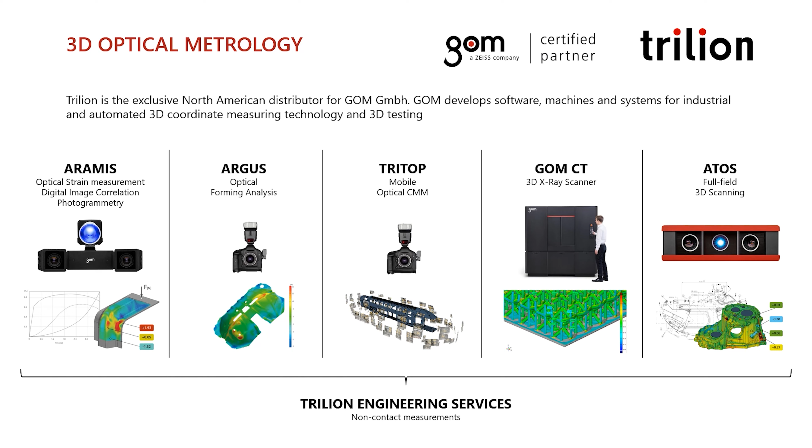These non-contact solutions have a place at every step of the product development cycle. Focusing on a few of the important steps today, we can identify topics where ARAMIS will answer those new challenges that the automotive industry faces.

ARAMIS was a critical part of the Ford F-150 conversion to an aluminum body. Along that process, ARAMIS was key in understanding the material properties and the mechanical behaviors of the vehicle design. Its data served as inputs for the simulation and for further design developments. The powerful part of ARAMIS is that every test completed correlates with the simulation across thousands of points.

Our agenda for today will be to cover these three stages of development and show you use cases in material and component level testing. So let's start with material properties.

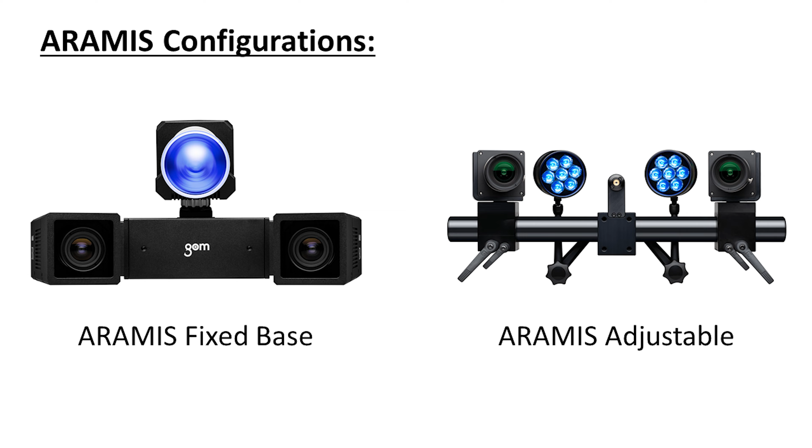Okay guys, we're inside Trilion headquarters, about to step into the lab. Before we do that, let's take a quick look at the ARAMIS. It comes in different configurations depending upon your application needs and budget, but the ARAMIS always has the same key features. Two cameras synchronized together, slightly tilted towards each other to see, just like your own eyes see, in 3D with that depth of field.

But the ARAMIS sees much more than the naked eye. It has the capability to measure displacements and strain deformations with incredible accuracy. So let's go inside the lab. What's going on in the lab today, Joe? I have an ARAMIS set up for material testing on our load frame.

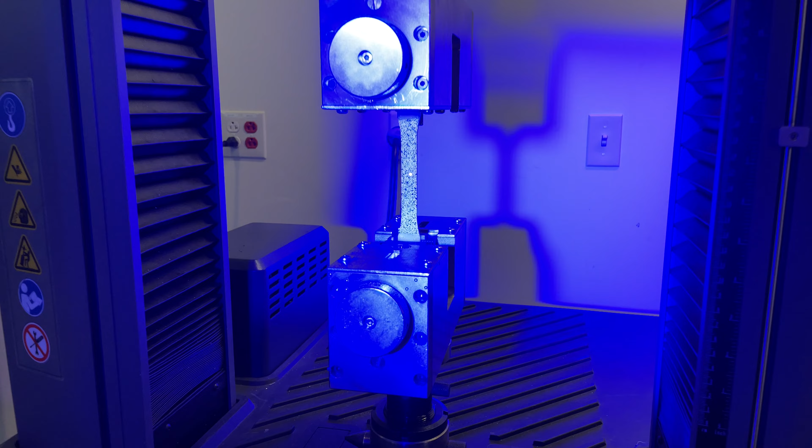This looks pretty cool. It looks like it's completely non-contact. You're just taking a measurement with just the cameras on the ARAMIS sensor pointed at the tensile coupon. Is that right? Yep. I apply a speckle pattern onto our coupon. I load the coupon like normal into our load frame. And then that speckle pattern allows the software to track the full field strain across the surface. It's like having thousands of strain gauges across your surface.

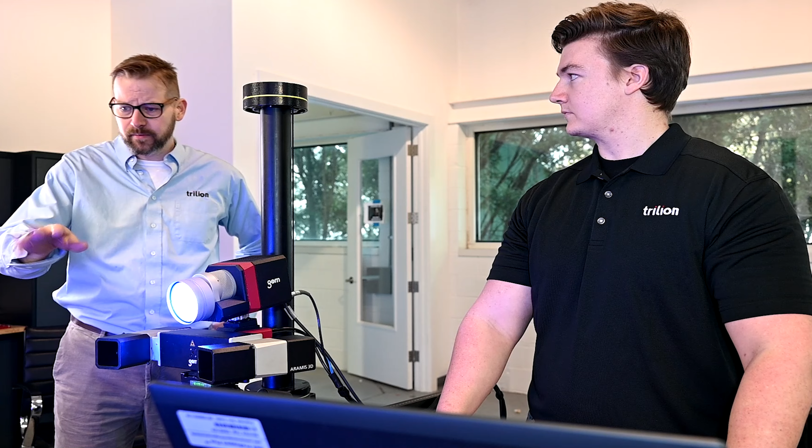Wow, okay. Well, if that's the case, then you must need a really good coverage of dots on the surface there. Can you show me how we would put that surface down? Sure. Here you can see some samples we prepared. These were completed with off-the-shelf spray paint. We spray on a light coating of flat white paint and then speckle on flat black dots on top of it.

Is that difficult to learn, to get used to like that? It takes some getting used to, but if you prefer, we have stamps, rollers, and even printers that will print the pattern for you. Okay, yeah, there's a lot of options there. That's great. Thank you. You're welcome.

Okay, great. Can you show me a little bit of the setup now? Because I'm wondering if you're linked to the load frame with the ARAMIS in some way. Yes, we are bringing in a cable out from the load frame into the ARAMIS controller, which you see here. This allows us to trigger from the load signal and synchronize all of our data together.

So I'm sure our viewers are wondering what type of material that you have here that we're testing. This is a plastic sample that we're using today, but ARAMIS can be used for any material because of its non-contact setup. As long as it can be patterned, it can be monitored for strain and displacement fields in time.

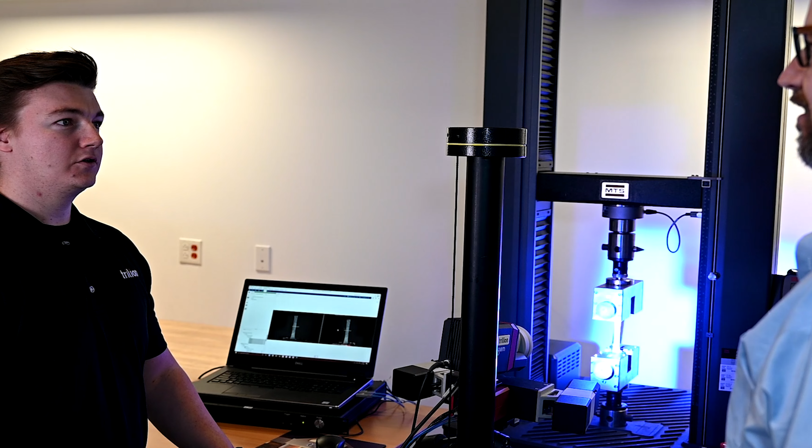So what about the geometry? Are we limited to just planar coupons such as this? No, some other interesting geometry applications common to our testing involve cylinders during compression and welded joints loaded uniaxially for inspection of heat-affected zones. That's really interesting.

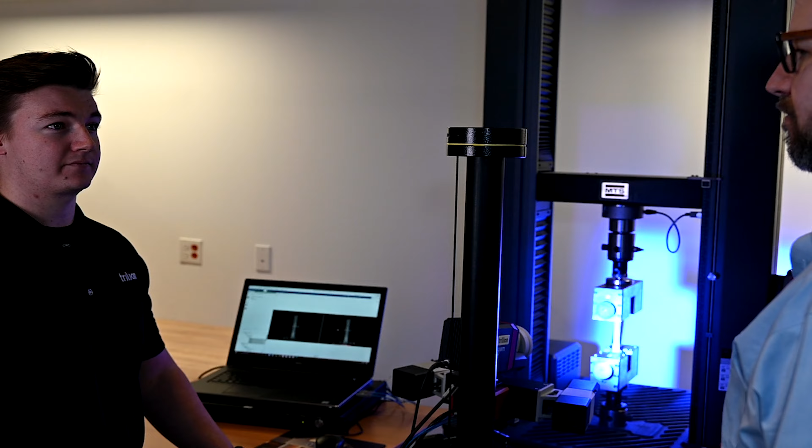What about shear strain propagation? Could you handle something like that? Yep, even shear strain. ARAMIS sees in 3D, so we will capture as much of the surface as we can see, measuring major and minor strains and directional strains, and we can get it all simultaneously across all those nodes of the speckled dots. Oh, that's fantastic. I'd love to see a demo of this.

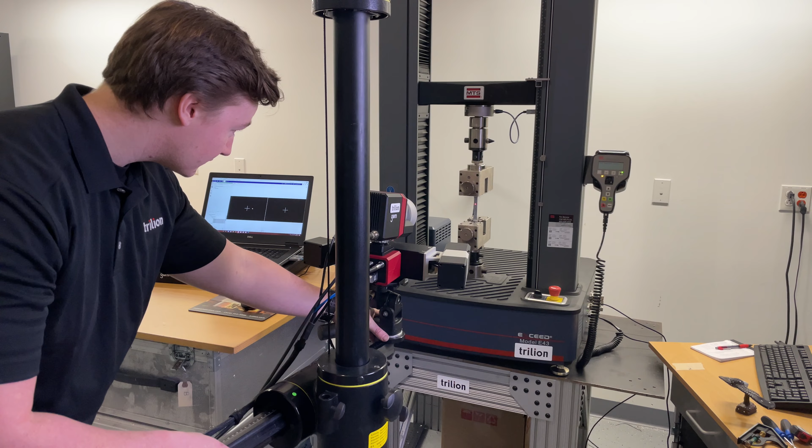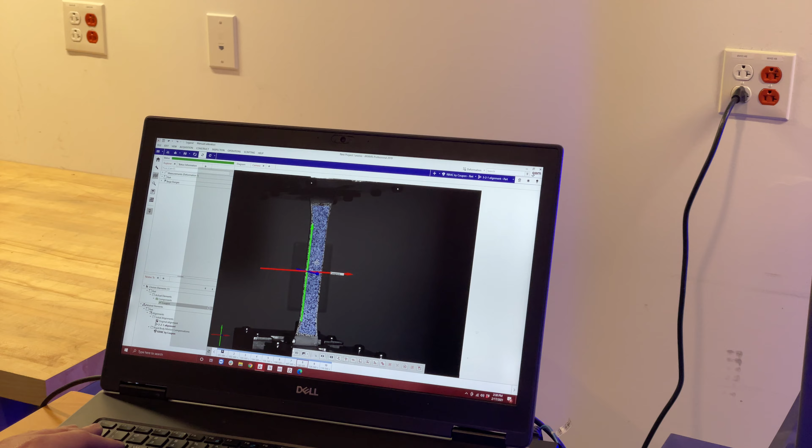In the software, we can manually inspect and take a look at live images of the entire surface of our part of interest. Once we have images here, we can then compute our surface and see the 3D nature of it. Zooming in, we can see the mesh structure and all the data points we get across the entire structure of our surface. Once we have our surface computed, we can then do strain inspections across the entire surface of the part. We're now seeing the full field strain across the surface there.

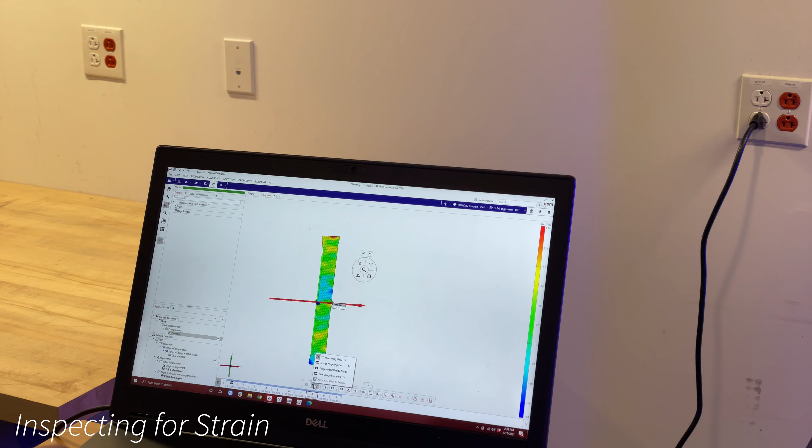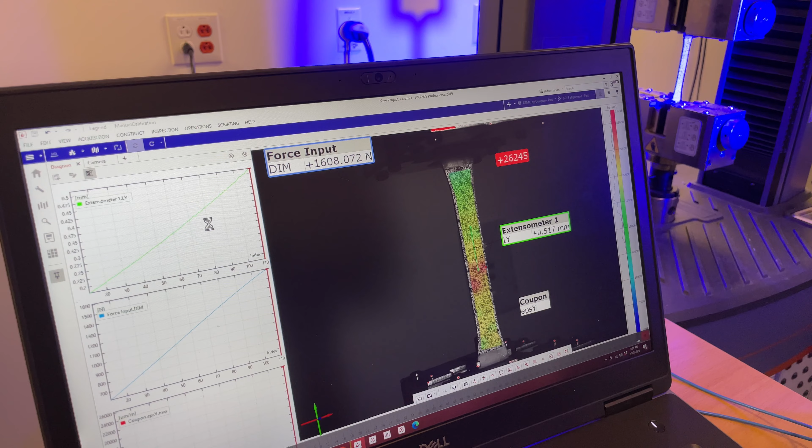Now during the live acquisition of our test, as we're recording and pulling the sample, not only are we seeing the full field strains live, we're also doing a 2-point distance or an extensometer and getting a live readout of that as well as a max strain level across the entire surface. And then once failure has occurred, we just simply stop the measurement.

So ARAMIS is used to measure material response in applications ranging from simple axial tension tests to shear testing to even split Hopkinson bar tests. Let's take a look at a few. The ARAMIS measurement technique delivers higher quality data for materials testing and is unmatched by clip gauges or strain gauges. ARAMIS offers the potential for thousands of points of measurement on advanced composite specimens rather than the 2-point tracking capability featured by most video extensometers.

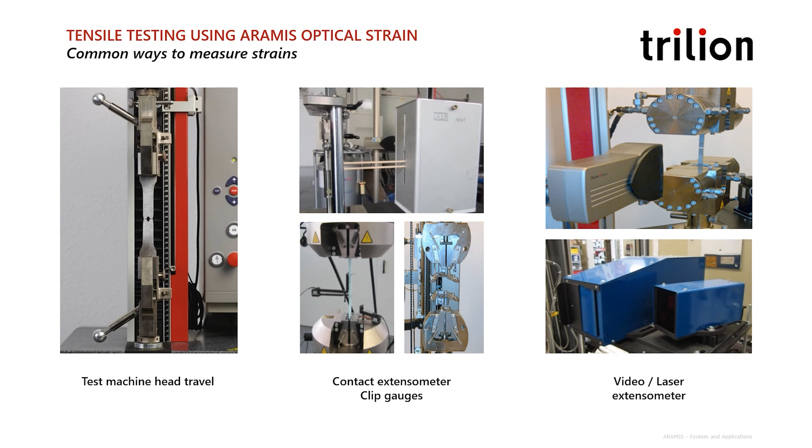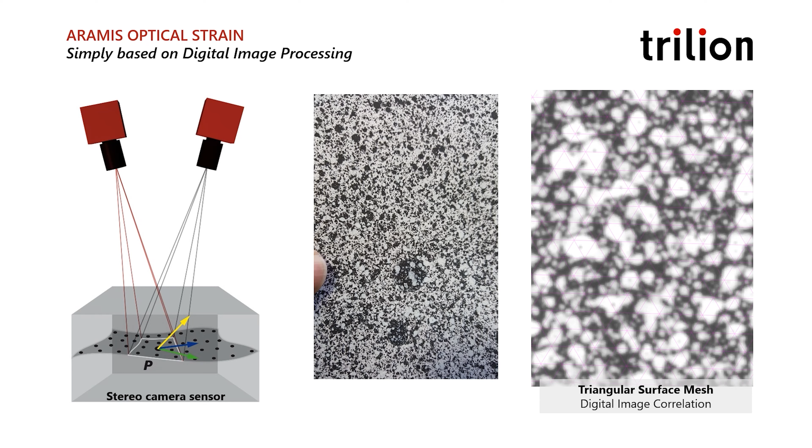The software will recognize the pattern and divide it into a triangular mesh that you can see on the right side. Each node represents a discrete location where we can pull strain information, both principal and directional. The spray paint becomes thousands of strain gauges across the surface. Think for a moment about the time it takes to lay a foil strain gauge, set up an accelerometer or an extensometer, and now consider how you can spray thousands of 3D coordinates across your sample surface.

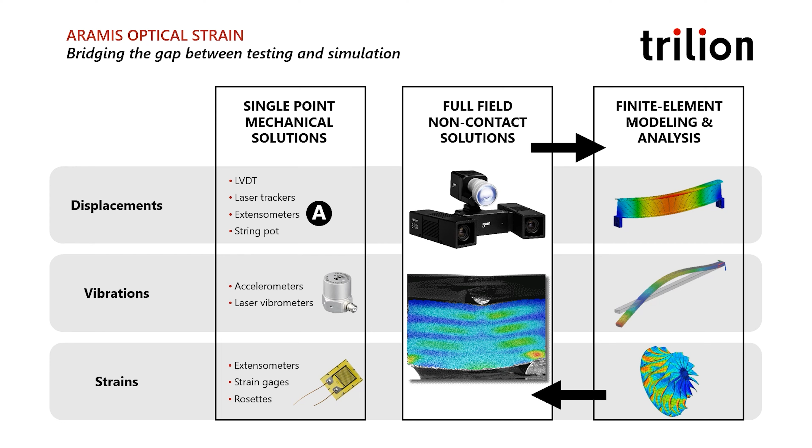We call this a full field measurement, and it tells a holistic story that can be intuitively understood just by viewing it. The ARAMIS has been certified as a class 0.5 extensometer according to ISO standards, or a B1 or higher extensometer according to ASTM standards. The data can also be overlaid into finite element analysis simulations, bridging the gap between simulation and reality. These full field measurements allow for examination of localized behavior and extraction of data at multiple distinct areas of interest.

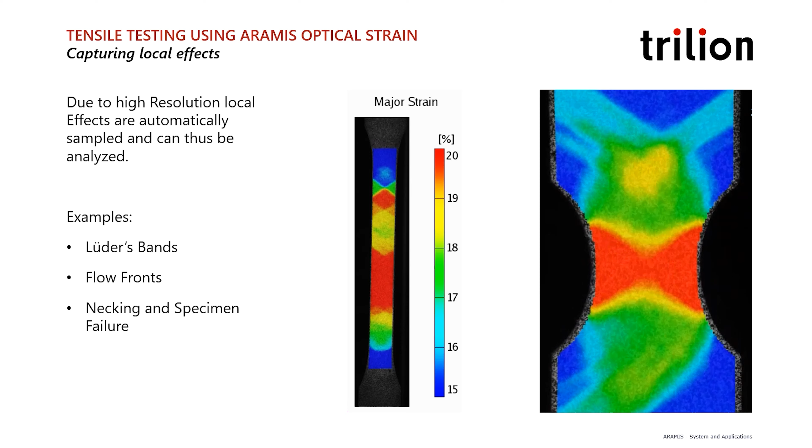There is no inherent length scale to ARAMIS, where a clip gauge or extensometer will be limited by its gauge length. ARAMIS can capture both strain localization and the global strain, and it's this high strain necking area that is responsible for more accurate material properties, a crucial factor in simulations.

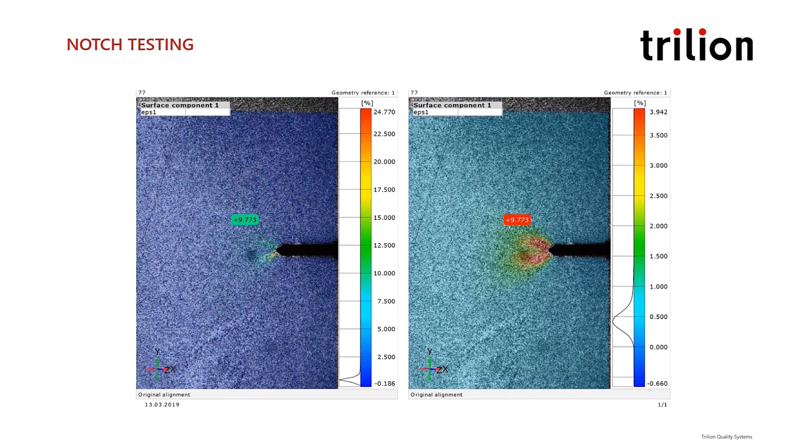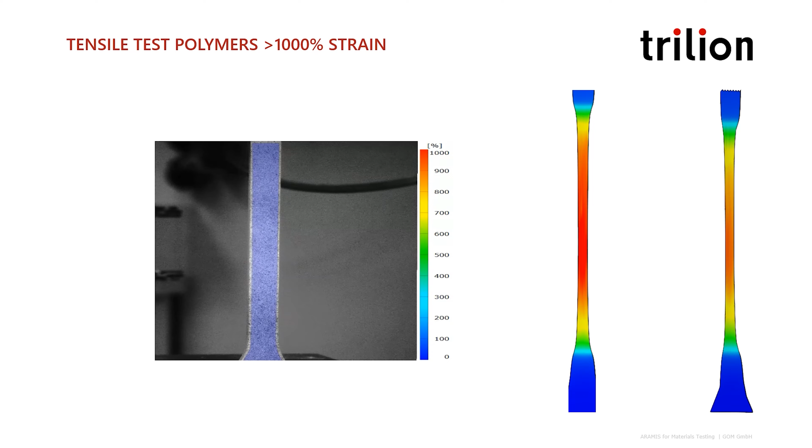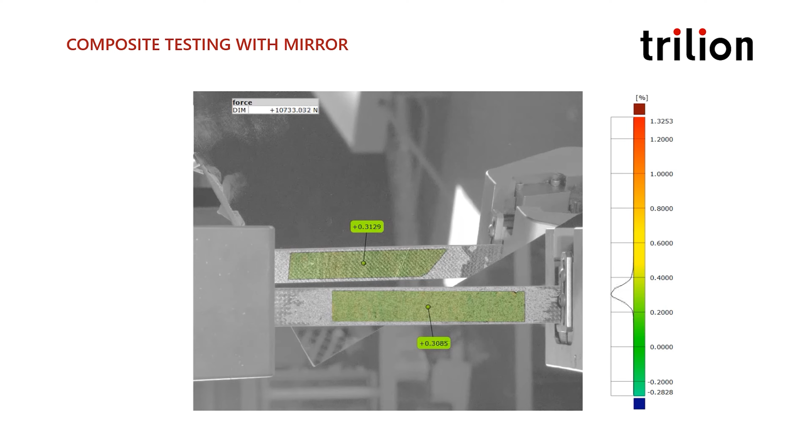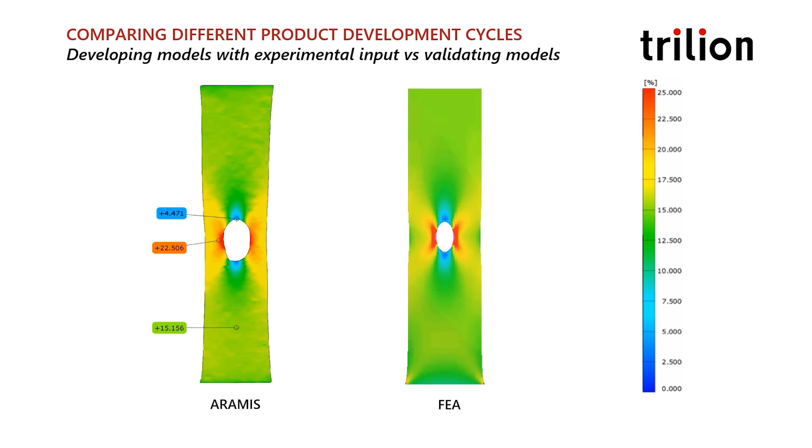ARAMIS works very effectively as an input to your developing simulation model. The finite element model can be brought into the ARAMIS software, aligned and compared to bring the model ever closer to reality. This system is independent of geometry. So far we've only explored planar samples, but it is not an issue to explore cylinders or other more complex geometries.

ARAMIS is also useful in measuring custom or non-standard tests. It is possible to track the speckle pattern during adhesive peel tests or shear tests, and ARAMIS is used often for sealants and adhesives, can easily track shear strain and other rotational measurements.

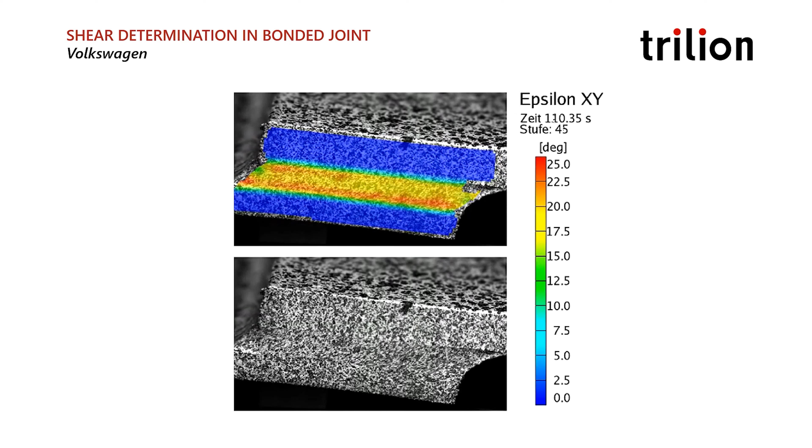When synchronized with load history data from the testing frame, the ARAMIS data can be configured to automatically plot the stress-strain curve and find material properties according to ISO ASTM standards. This can be configured as a technician's tool, minimizing the number of mouse clicks, but also the amount of training needed. The kiosk mode prompts the user for the steps of the measurement.

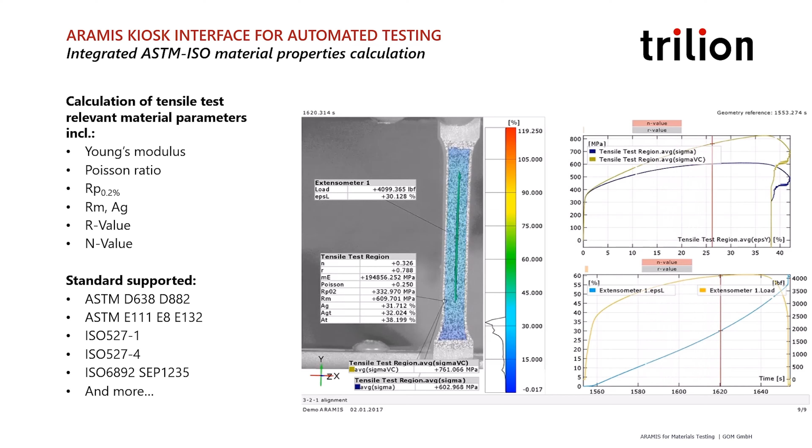The system is independent of temperature and can see through a chamber window to make strain measurements such as this, a tensile test of magnesium at 300 degrees Celsius. Our researchers have developed a partnership with infrared cameras to create an ARAMIS thermography module. An IR camera with trigger synchronicity is linked to the ARAMIS, and the thermal data can then be brought into 3D coordinates and mapped across the specimen's surface.

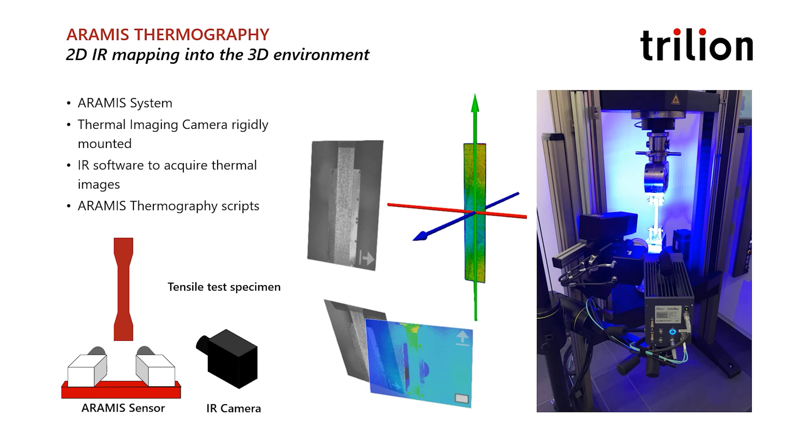The coupling of temperature and strain data often is a byproduct of the large temperature range of operational environments. Sometimes the functional integrity of the material may depend on the influence of temperature. This thermography module is useful in a dynamometer on the hot side of an engine, or to the powertrain group, measuring an exhaust manifold, for instance.

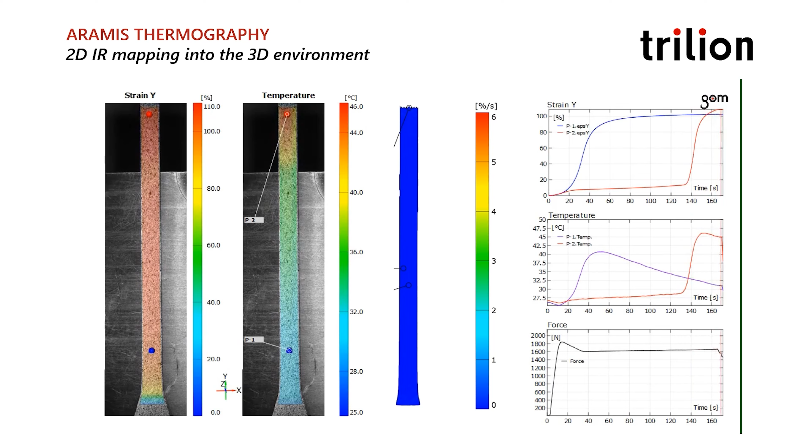It is also very useful in microelectronics. In this experiment, the temperature mapping is correlated with thermal expansion. If the user understands the material coefficient of the thermal expansion, ARAMIS can compensate and isolate the mechanical strain.

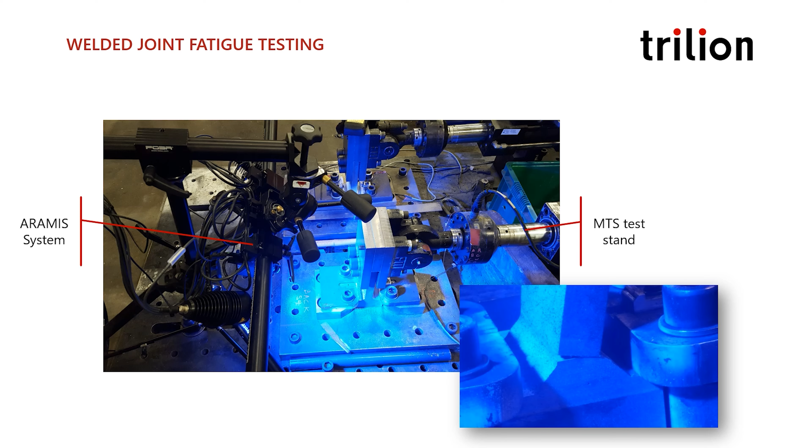The system is independent of time, measuring this high cycle fatigue test of a welded T-joint. In this experiment, the T-joint was rocked back and forth cyclically by the load frame, and ARAMIS captured at peak load times. Over the course of 20 hours, the T-joint crack began to open. The analysis here was done after failure. A virtual 2-point distance was placed down to monitor the crack opening, but only after discovering from the images where the crack originated.

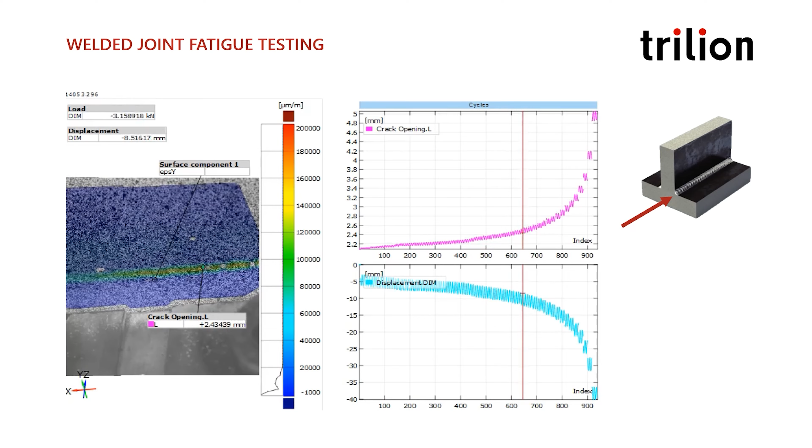Sheet metal testing is an indispensable part of automotive production. The OEMs monitor their tool and die for forming severity of a stretched or draw product with our ARGUS technology, but our ARAMIS could tell them more. The severe forming that takes place in production cannot be understood through uniaxial testing. Biaxial dome testing, such as the Nakazima or bulge test, yield the material properties necessary to build sheet metal forming limit curves.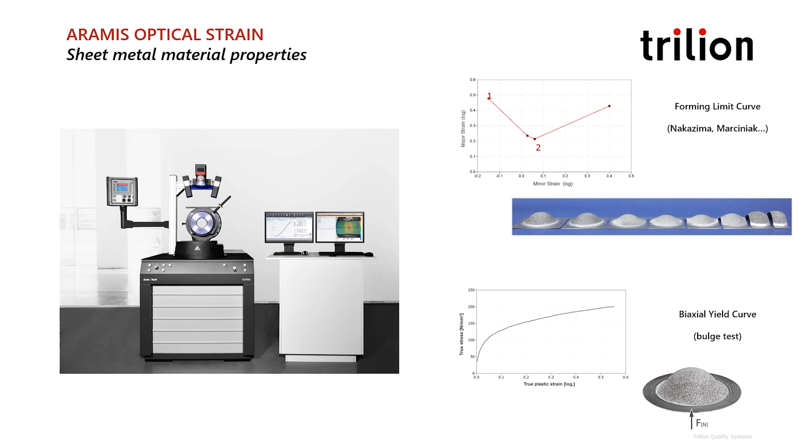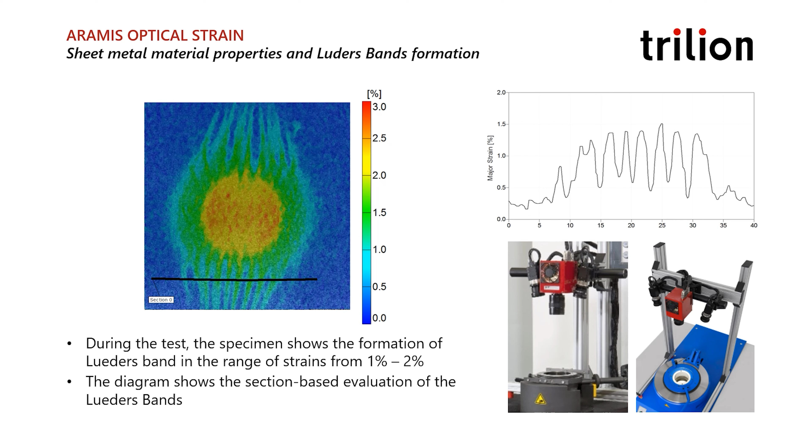The ARAMIS is mounted above the dome and shielded from the high pressure oil while the material is taken to failure over a series of tests. The ARAMIS is designed to take this data and automatically process it according to ISO standards. This results in a forming limit diagram such as this, a crucial predictor of material behavior for production quality.

The system is independent of time, temperature, loading, and geometry. A user can set their own gauge length according to their application. ARAMIS is capable, unlike conventional tools, of measuring high strain area in an accurate way. It is non-contact, it's massless. ARAMIS will measure both local and global strains. It's capable of scripting and it features a kiosk mode. The most powerful benefit is its ability to overlay results with finite element models, making it an indispensable tool for materials research.

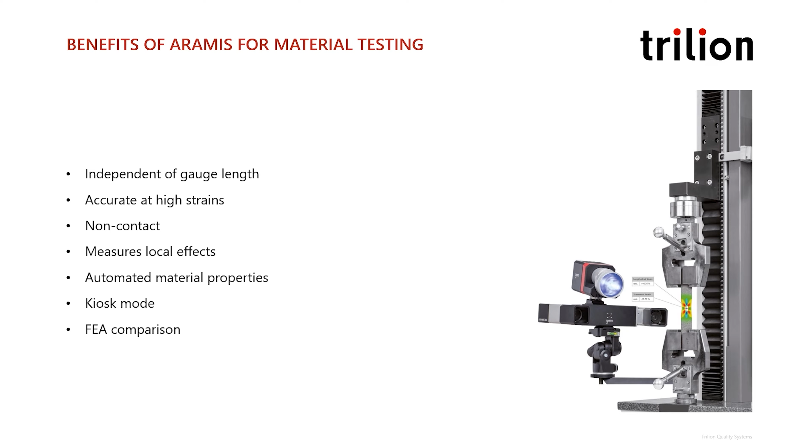We're back on site at Trilion headquarters for a second round of testing. We now have a better understanding of the ARAMIS, its setup, interface, and its critical ability to provide input parameters into the simulation model. Let's now turn to product design. ARAMIS can also help develop input parameters for structural and component level testing. We're going to be exploring how ARAMIS can work on an actual vehicle. So let's step into the lab and take a look. Come on.

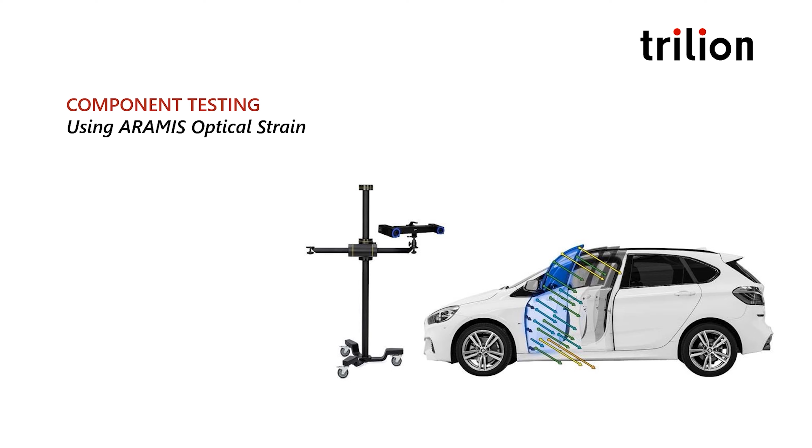Now let's turn our attention to ARAMIS component level testing, where we can measure and inspect features from small to large all around the vehicle. Another way of tracking that the ARAMIS uses is point marker tracking. These are lightweight adhesive stickers that are optimized in size for your field of view. We feature them in different variations. Some are easy to take off, some are permanent, some are magnetic and reusable, and some are capable of withstanding high temperatures. Wherever you place one, the system will automatically find and track a 3D coordinate for displacements and vibrations.

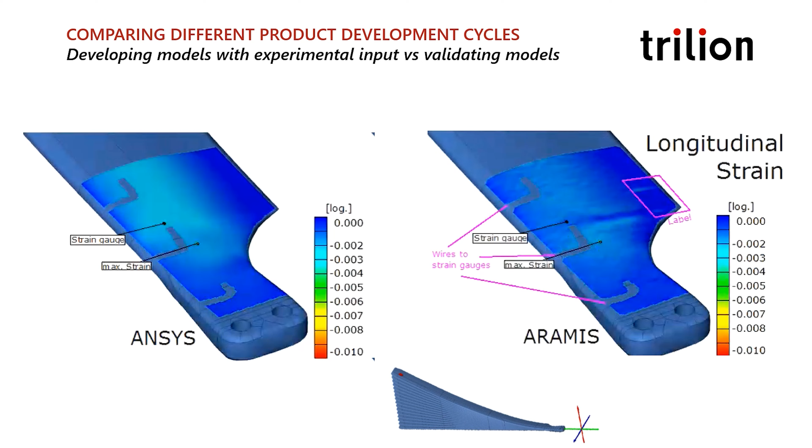Here is an example of a simulation being compared with ARAMIS full field reality. You can see the shadowy representations of the wired strain gauges in both the simulation and the ARAMIS on the right. The CAE department had predicted and instructed the test engineer where to place these sensors. The strain gauge data showed some deviation from the simulation, but the ARAMIS told the full story. You can see a splicing defect just out of reach of the strain gauge.

Hey Joe, how you doing, man? Looks like you've got some stickers here. What you up to? Yeah, Justin, I'm putting down some target dots on this hood here. Each target dot is going to give me a 3D coordinate space that I can track and measure. You already saw that speckle pattern before, which is giving us that full field strain coverage. But each one of these target dots is going to give me discrete point locations that I can measure. That's great. So you're measuring displacement with these dots then? Exactly, yeah, we're measuring displacements. Okay, cool. So it looks like you've got them all over the hood. And are you going to be tracking the movement of the hood?

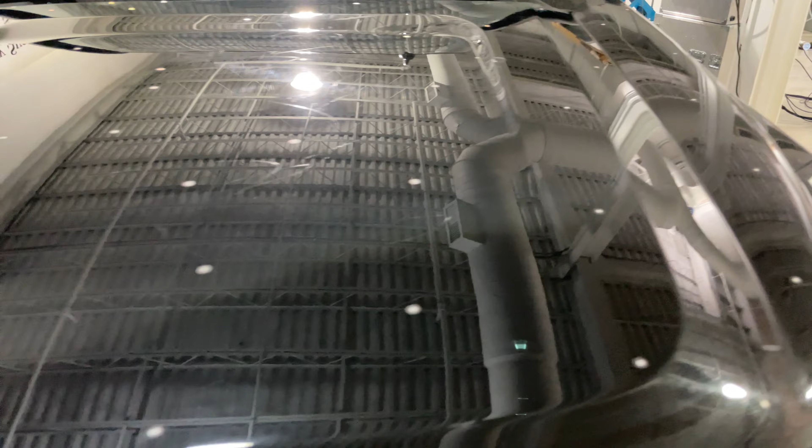Yeah, so actually what I'm going to be doing is I'm going to slam this hood down, and then I want to track the relative motion of the hood here. Wow, that's pretty cool. It's going to be really fast. But you know, you have some dots here on the side. It's not even part of the hood. What's your reason for doing that? Yeah, so I put these dots here on the body so I can do a rigid body motion compensation. What that allows me to do is look at the relative displacements on the hood instead of the whole global motion of the entire car as I slam my hood down. I see. When you slam it down, you're going to get a global motion. You can correct for that. Exactly. That's really cool.

But slamming a hood is very violent. I would think you need to have high-speed equipment to do something like that. Right. So what I'm actually going to do is use that light gate there, which is going to be sending a signal when I slam that hood down to our sensor, and our sensor does 2,000 frames per second, which is perfect for the automotive industry. Okay. But if we do need to go higher than that with the frame rate, then we can provide Photron cameras. Wow. Okay.

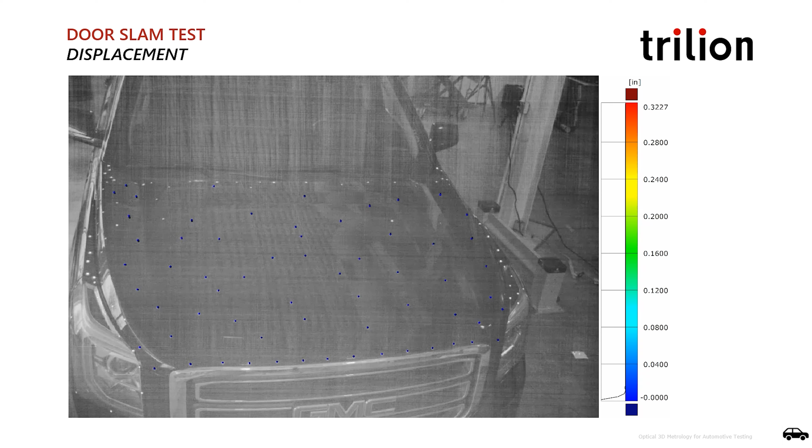Through the rigid body motion compensation feature of ARAMIS, the displacement of the hood is isolated and the full motion of the vehicle has been compensated from these results. Here you can see the vectors telling a story of direction and magnitude. What area sticks out to you?

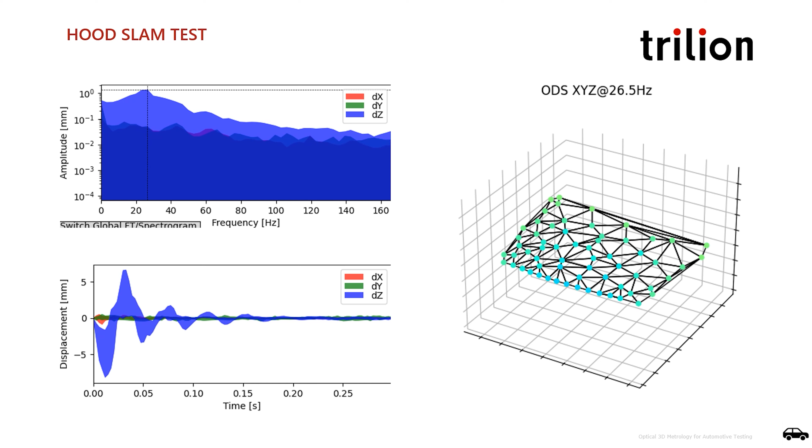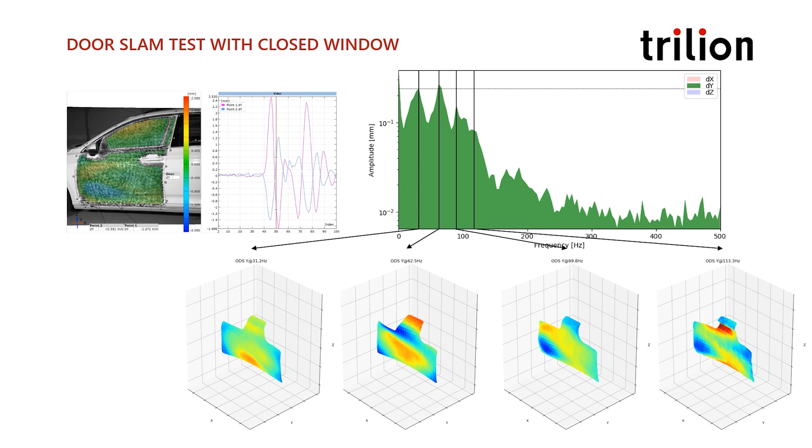ARAMIS can be used under the hood as well, so let's take a look at a quick engine study. ARAMIS customers use the technology to measure and verify simulation on many parts of an engine. Perhaps they are interested in an oil feed or drain and its vibrations, or they're interested in thermal expansion of any number of components, whether they be bellows, flanges, inlets, outlets. These can all be very important as new turbo engines are developed.

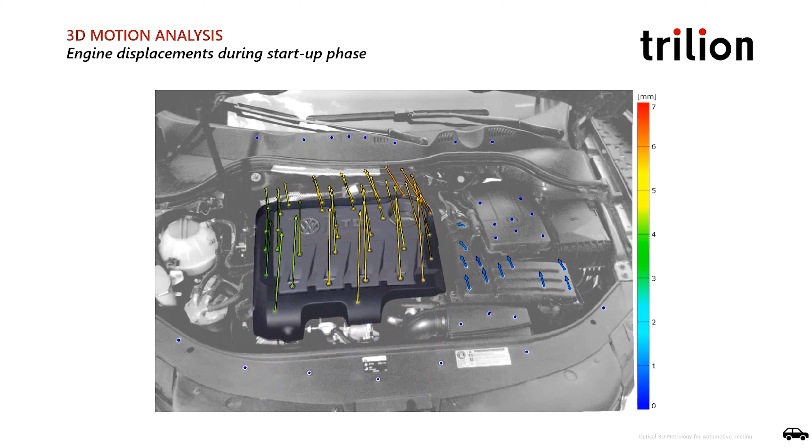In this test, we wanted to measure and isolate the engine during its startup phase. The point marker stickers we place down on the body of the vehicle serve as our reference as we measure the engine top while it starts up. The vectors tell a story of direction and magnitude.

Wow, that was a cool experiment, Joe. I feel like ARAMIS just has so many possibilities. It really makes me wonder what else we could do with it. Well, if you would like, we can roll this sensor to the back of the car and measure the displacements of the lift gate as it closes. You can just do that? You don't need to recalibrate the system?

Not at all. So this is an ARAMIS fixed base sensor. What that means is that we can go long periods of time without needing a recalibration. That's nice. So it sounds like the setup is just patterning and then positioning the cameras. Is that true? Yeah, so we can do this exact same setup with the lift gate, the body side, the tires, the whole vehicle. Wow, okay. Just rolling around your lab, taking measurements. That's pretty cool. Let's go do it. Yeah, come on. Cool.

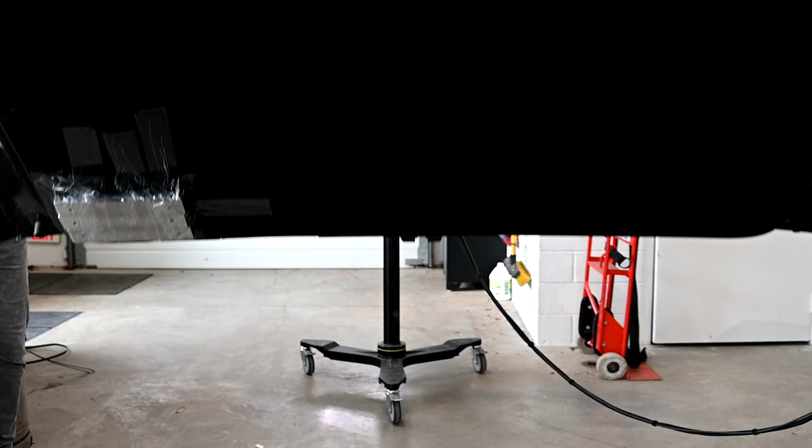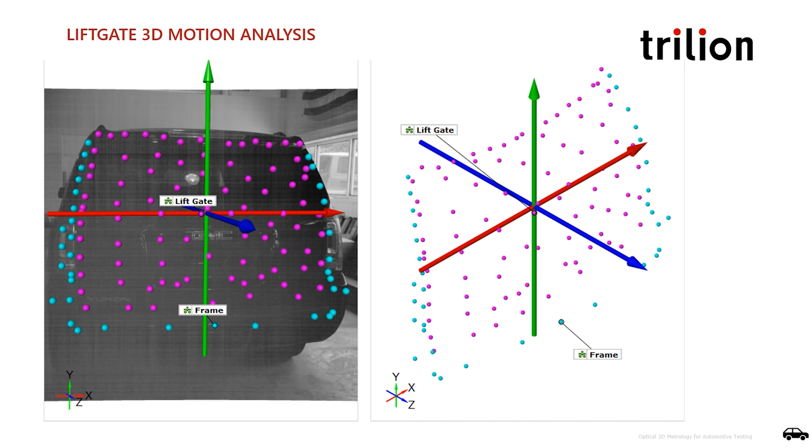For this project, we selected the dots for the frame and then for the liftgate, keeping them separate for our rigid body compensation and isolation of the liftgate. For this project, we shut the liftgate 3 times.

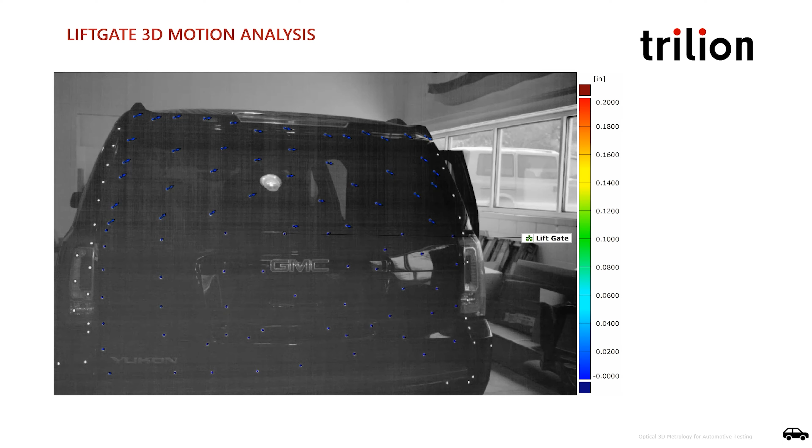We wanted to do a simulated design comparison, so we added some weight to the right side of the liftgate to see what happens. The first iteration was with no weight, just a standard close of the gate, and the second we added a 1-pound bar. You'll see those displacements grow larger from the first time. And the third iteration, we added 3 pounds. The motion analysis shows larger and larger oscillations with the progressive loads, as you would expect.

Joe had put some stickers on his tail light, so we thought to pick a few dots and inspect them. Definitely some movement during the close of the gate here.

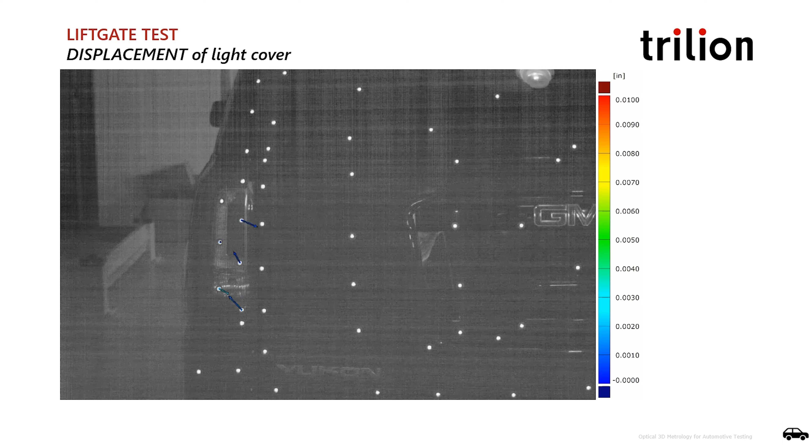We constructed some 2-point distances for inspection to take a look at the gap along the body and the tailgate to see if we saw some changes. And you can see some slight changes as you move progressively through the 3 different iterations. What appears to be happening is the door is locking into place still, and it's just oscillating a bit afterwards.

We use the stickers on the glass to isolate the glass surface for an out-of-plane inspection. In the ARAMIS software, you can ask it for minimums and maximums, and it automatically will plot them for a surface. You can see the same trend here. The glass seems to be oscillating in and out of plane, further and further, with the weight being added.

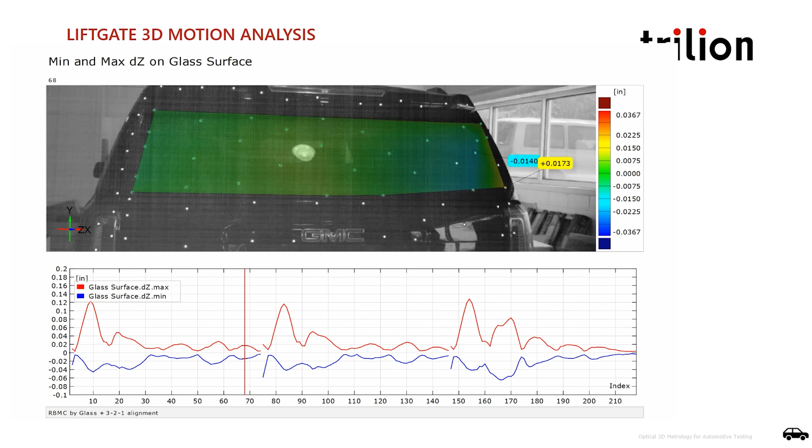Many consumers are unaware, but tires are very complex. Researchers in this space use ARAMIS and computer modeling to accelerate their tire design development process. These tire designers have huge databases of material information from the ARAMIS material data they collect, and they use it in their simulation. However, there are so many variables in tire design that further testing is required to verify the predictions, so that same ARAMIS system is then moved from the load frame to the test rig to capture those dynamic deformations.

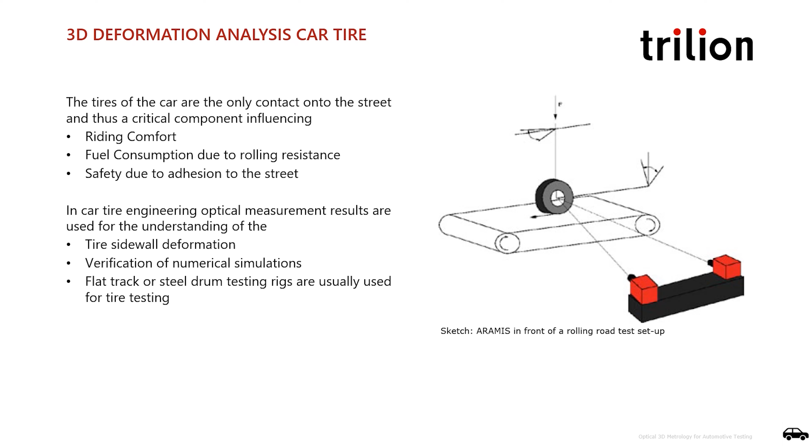Tire construction, especially tread and footprint, are important. With the wrong parameters, the driver could experience harsh riding, poor handling, possibly even noise. In this experiment, ARAMIS was mounted underneath a flat-paned window that the tire drove over, allowing the ARAMIS to view the tread under load. Because it is capturing in 3D, an inspection of the curve of the tire can be made at varying section lines.

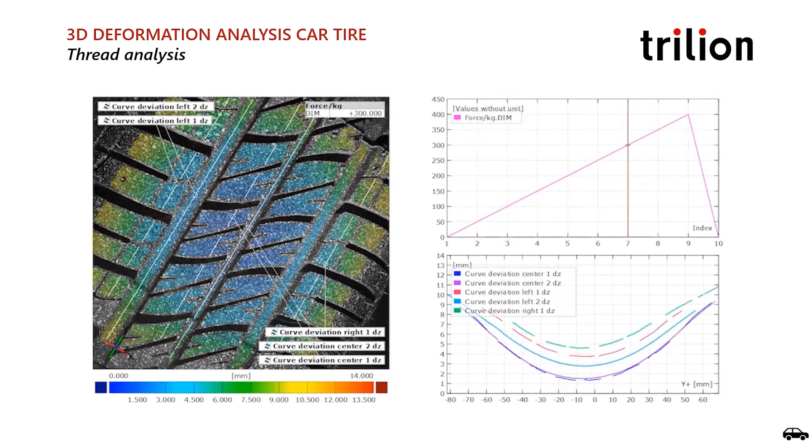One of the more unique capabilities of ARAMIS developed here at Trilion is the tire shape measurement. Instead of spraying on paint, ARAMIS projects a light pattern across the surface and collects the shape at moments in time. This has proven useful to aerodynamic groups.

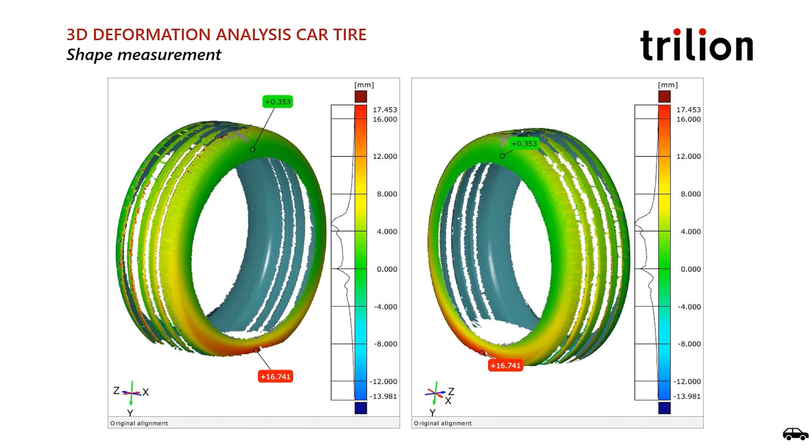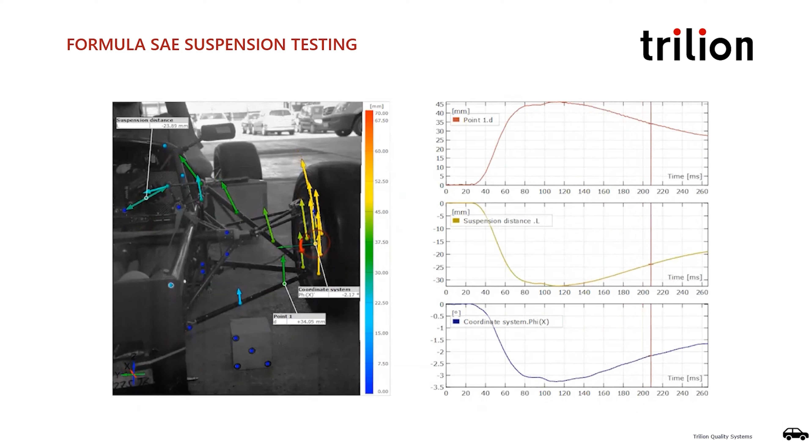Now let's turn our attention to a rotating part. The next test will involve a cooling fan. The test setup involves placing point marker stickers down in any area we would like a 3D coordinate for tracking. ARAMIS can overlay with CAD or FEA. In this case, CAD was brought in to align with the customer's coordinates.

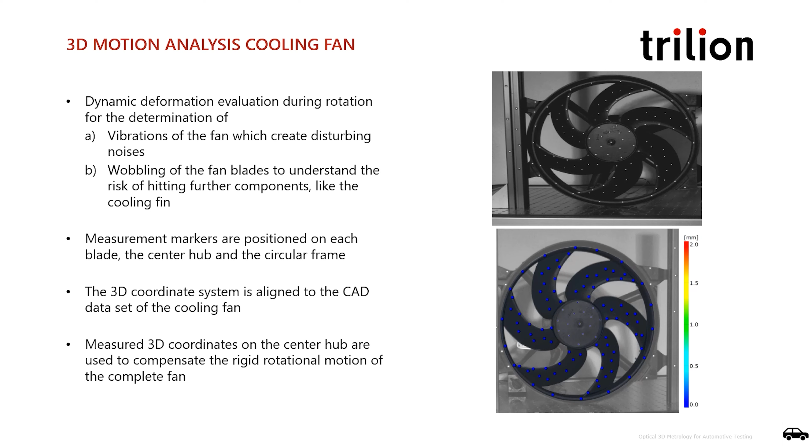The ARAMIS will capture at 1,000 frames per second to track the movement of the fan throughout. Notice that there are stickers at the center hub. These were used as a rigid body to inspect for deformation of the fan blades. As the RPMs come up, you can see a wobble in the blades relative to the center hub.

The user can select any points in this project, and here 6 were selected. Automatically the data for each point will be plotted out in the diagram. This is an inspection of the out-of-plane displacement.

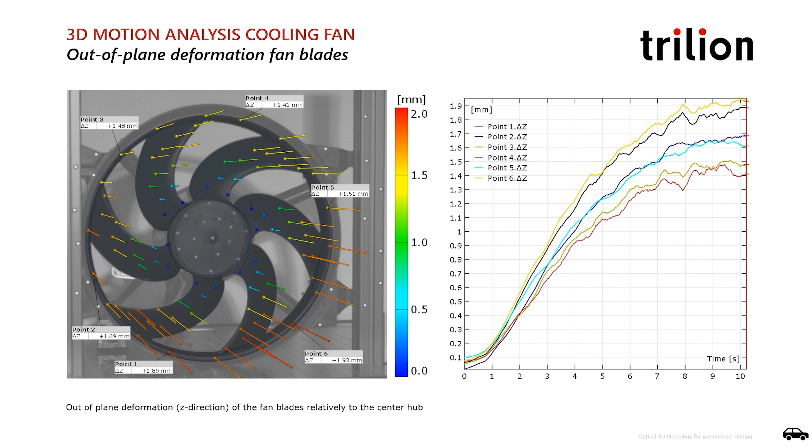ARAMIS is routinely involved with automotive companies to employ wind tunnel testing. These companies often want to evaluate aerodynamics of different components, like the side view mirrors, roof racks, spoilers, grills, air dams. Wind tunnel time is very expensive, and the ARAMIS customers roll their cars in with stickers ready to go as the ARAMIS sits either mounted above on a gantry or off to the side just out of the airflow.

The area of computational fluid dynamics is quite complex, and simulations are better than ever. Small changes in product design can have a large effect on airflow fields and overall drag. ARAMIS can help researchers to understand these effects and improve performance in their design. In this performance test, the users place stickers on the leading front cover as a rigid body and stickers along the front fascia bumper to examine the deflection of that bumper.

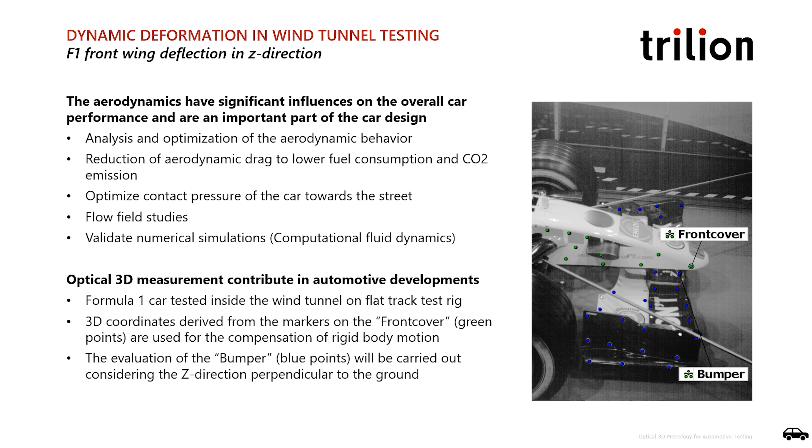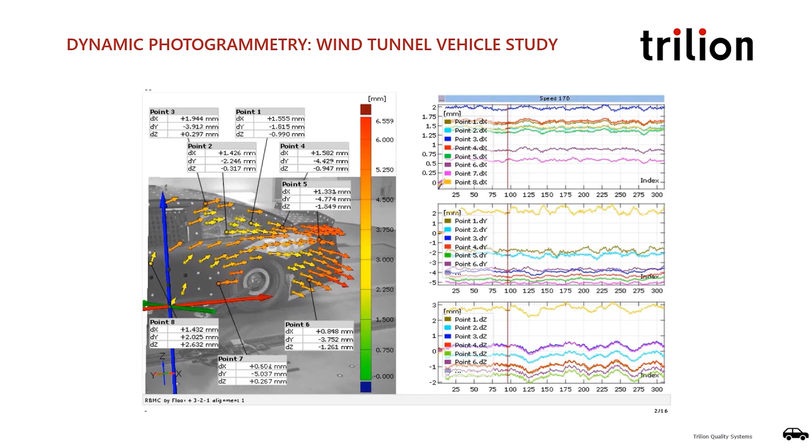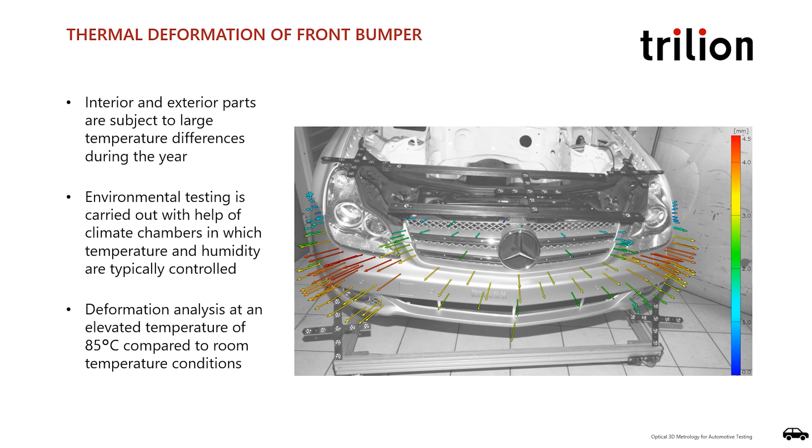Whether it's thermal shock, thermal fatigue, or just thermal deformation in general, thermal analysis of vehicle components is very important to the automotive industry. We first capture images of the vehicle at room temperature. Then we take images of the vehicle soaked at 85 degrees Celsius. This can be done through a window or by rolling in the system quickly. Or perhaps Trilion can provide you a housing for your ARAMIS, so that you can have the ARAMIS in the environmental chamber, provided there is room. ARAMIS can be used to inspect for gap change during thermal loading and ensure quality design.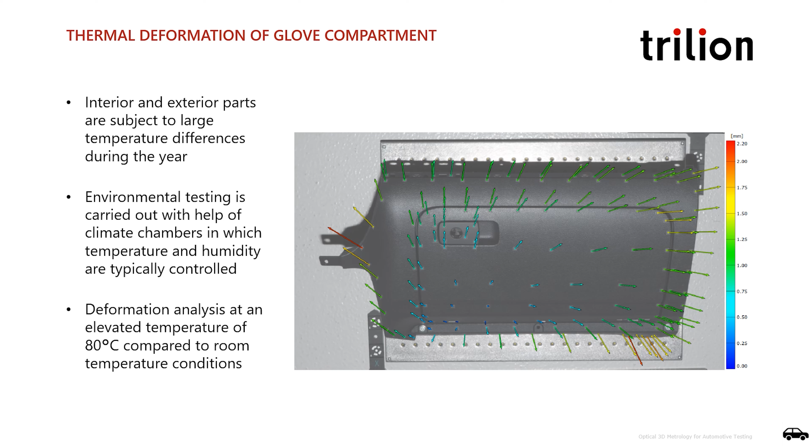But it's not limited to the exterior of the vehicle. ARAMIS can inspect the interior as well. Here's a project with a glove compartment undergoing thermal load. If we zoom into the opener, we can see that this inspection can check for deviations and tolerancing for the product design.

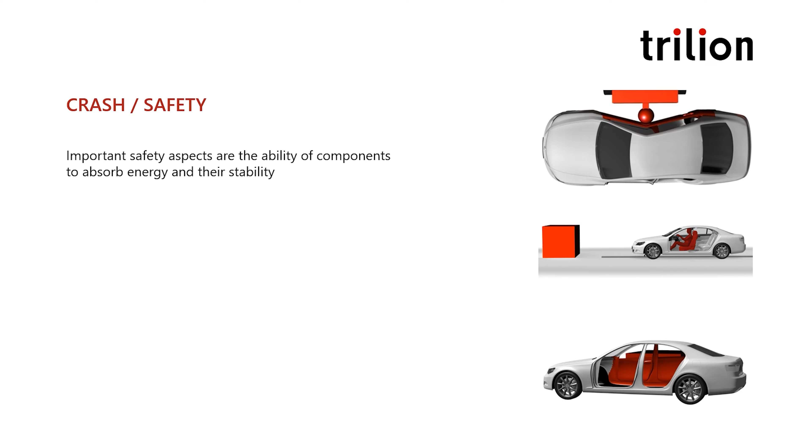Researchers use crash test data to improve the safety and reliability of vehicles. ARAMIS has been used in sled tests, front impact, side impact, seatbelt studies, sunroof crash worthiness studies. Here are a few projects in crash safety. The ARAMIS cameras are positioned at the end of the sled test to capture the full motion of the dummy.

Point marker stickers were placed onto the base of the seat to serve as a reference for all displacements on the dummy. Extra stickers were placed on the dummy head to create a local coordinate system for the 6 degrees of freedom tracking. Typically, safety labs will have a witness camera filming their sled test. It gives them qualitative results. ARAMIS takes those images and makes them quantitative.

From this test, ARAMIS yielded an understanding of the rotations of the head motion and velocity. You can see it plotted out to the right. It also can show the full trajectory of the head throughout the event.

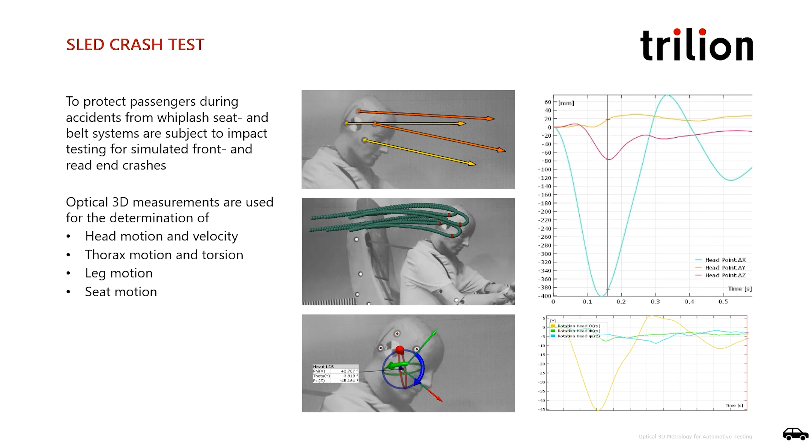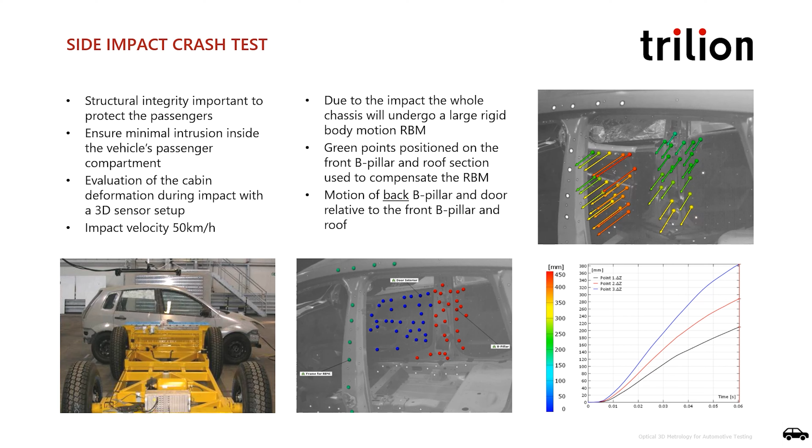In this side impact test, you can see the ARAMIS hanging from above on the left. The B-pillar and roof section was used as a rigid body to compensate for the global motion. This was an impact at about 30 miles per hour. Capturing glass break is not a trivial undertaking. It's very brittle. This is a head impact test into patterned glass, so the ARAMIS is able to track the glass full surface as it undergoes the impact.

Sometimes it's just easier to use ARAMIS than it is conventional tools. Take this accelerator pedal, for instance. This is a fairly standard test with easily obtainable results. The ARAMIS setup is just stickers. ARAMIS brings the load in via BNC cable and synchronizes the force. The force versus the pressure of the bar is then analyzed. To take it a step further, our researchers used an ARAMIS touch probe to pinpoint the location of the force.

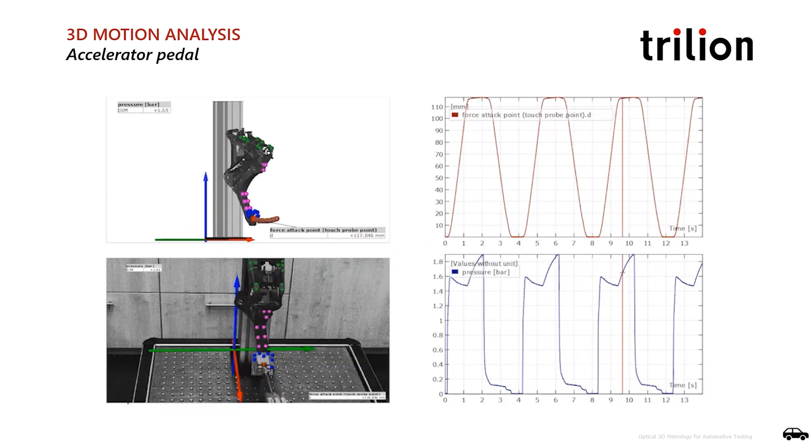The more analysts know about their part, the more accurately they can deliver their models. ARAMIS is designed for less testing with more data, an abundance of data really. Shape, displacements, strains can all be compared and used as input for the optimization of simulation models.

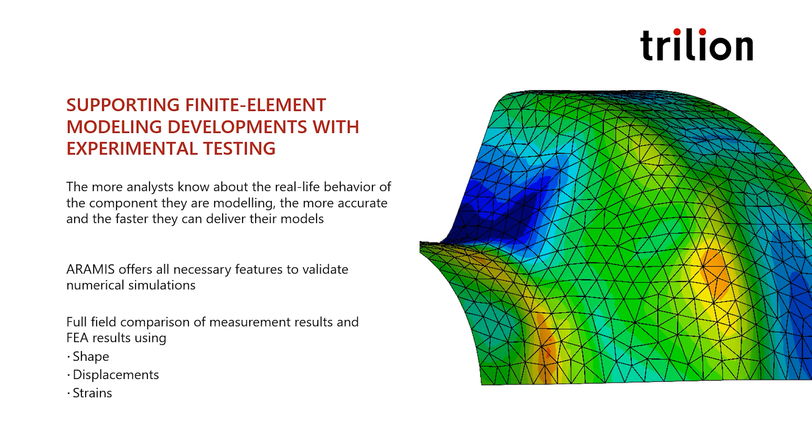Here is a mock project showcasing how ARAMIS works well with simulation. This is an injection molded part we affectionately call the bumper. The bumper has a fixed support and a load is applied in a downward motion. The ARAMIS is on the left, capturing the reality of displacements and strains, whereas the simulation has its fixed starting position on the right.

After the ARAMIS test, a comparison is made between the simulation and the reality. ARAMIS data on the top, simulation on the bottom. A section line is constructed and the displacement across the profile in the y direction is plotted in the diagram. Notice the disparity between the simulation and ARAMIS at the outer edges, nearly 0.5 millimeter. It's quite large.

Keeping the section line and just updating the inspection to major strain, the ARAMIS reality data in red shows those same large differences. Then again, across displacement in the z direction, you can see the outer edges of the bumper are simply displacing more than the simulation had predicted.

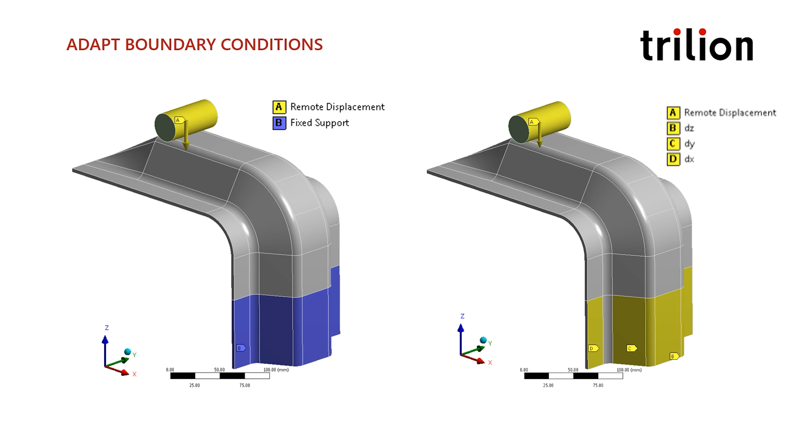In consideration of our test setup, our fixture may not be the most fixed at the base. If the condition was loosened a bit in the simulation, it may account for the extra displacement. Now the simulation has been optimized to have conditions that are closer to reality, and the results draw closer to ARAMIS data. The now plotted pink line is the optimized simulation.

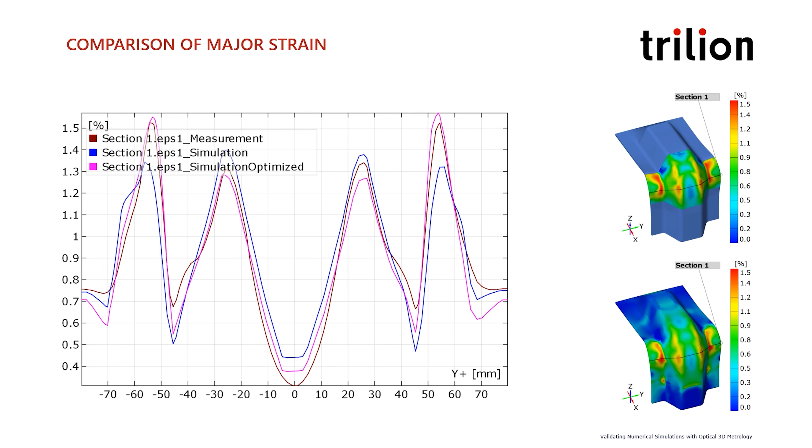By using ARAMIS as inputs to your model, maybe just to discover a boundary condition like this, an assumption that was made somewhere along the way, it helps analysts fine-tune their models and get their simulations closer to reality. Moreover, ARAMIS customers report that the data helps to understand their testing. With the ARAMIS capability of referencing itself, it often ensures that the test is measuring what it claims to be testing, providing confidence in the data to both the test engineer and the CAE team.

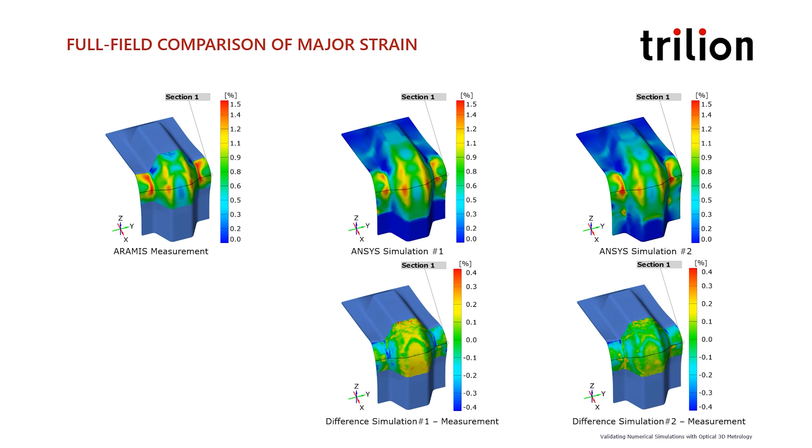All right, well, thanks a lot, Joe. I really appreciate your time today, and we learned a lot about the capabilities of ARAMIS, so that was excellent. Look forward to coming back and learning more. Of course, Justin. We have a lot of interesting innovations coming up on the horizon, so you should really come back and check it out. Oh man, you gotta leave me with a teaser. I love that. I'll see you soon, man.

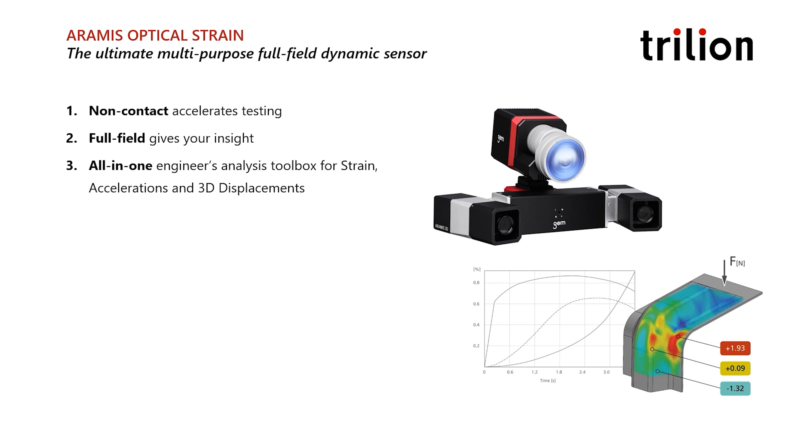Thank you. Yep. Conclusion, here's a quick summary of ARAMIS. It measures optically and has a seriously fast setup. It gives you data all across the material or part, including the necking area of tensiles. It's capturing strain, displacements, and accelerations at the same time. It can change its field of view just by changing the lens. It's independent of material, time, temperature.

It can capture static thermal expansion images or dynamically measure a rotating fan, as we saw earlier. It's insensitive to motion in your project. It's designed to adapt and can help you adapt your simulation to be closer to reality. It interfaces well with test machines, and I really hope that this has been interesting for everyone listening.